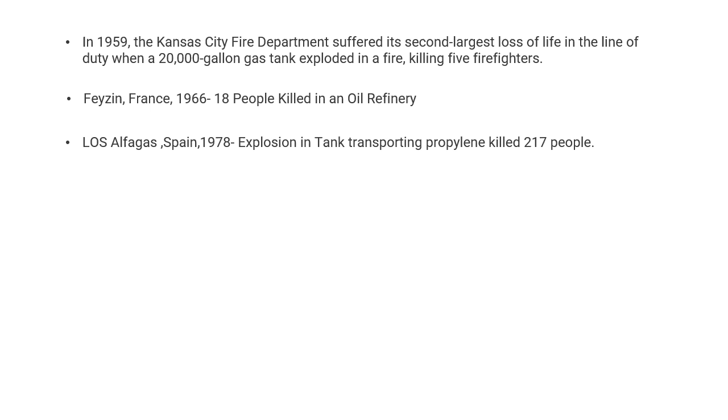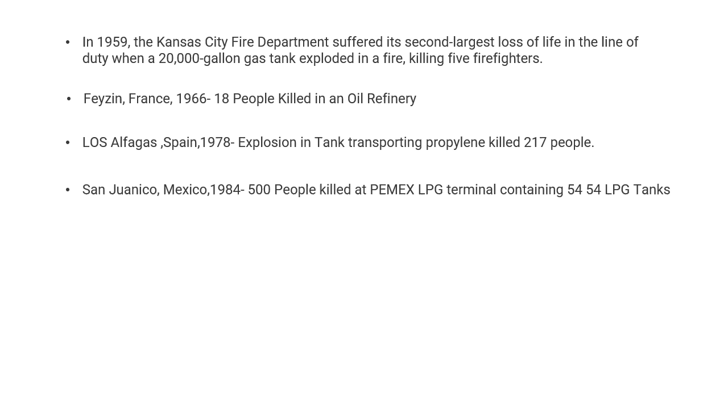But the most devastating of all occurred in San Juanico, Mexico in 1984, where an explosion at the Pemex LPG terminal killed 500 people, turning the area into a scene of utter devastation. These incidents remind us of the catastrophic power of BLEVE and the need for vigilance in our industry.

But what is BLEVE? Simply put, a BLEVE occurs when a pressurized tank containing liquid above its boiling point fails. The rapid drop of pressure causes the liquid to vaporize explosively, creating an intense pressure wave. If the liquid is flammable, this often leads to a massive fireball.

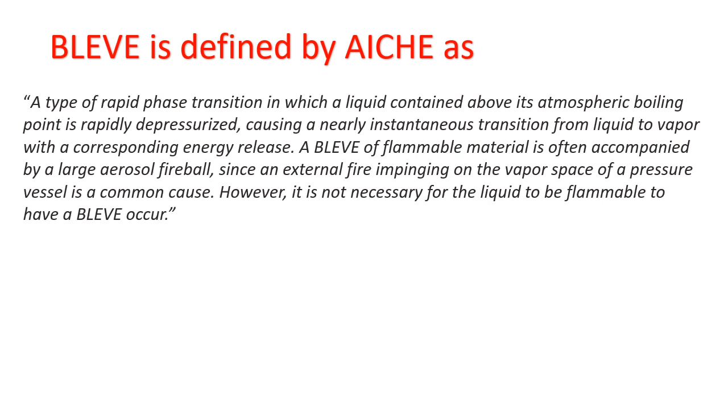The contents of the tank, typically a mix of liquid and vapor, become a deadly force when the tank structure fails, leading to a rapid and violent explosion. Now, what causes BLEVE? The most common trigger is failure of the tank structure due to an external fire or corrosion.

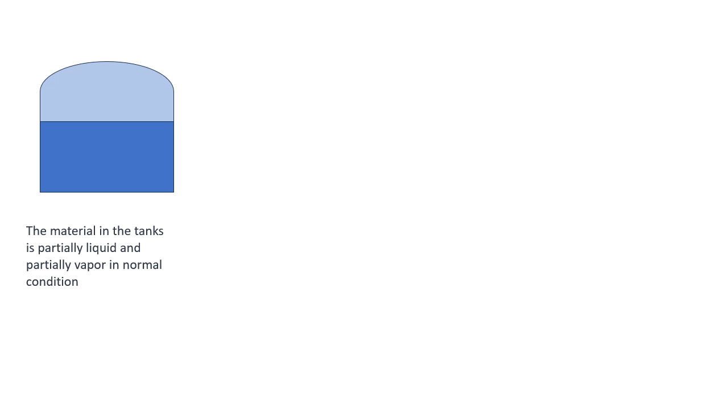As the fire hits the tank, the internal pressure rises until the tank can no longer contain it, leading to a rupture. The sudden release of vapor creates a shock wave, and if there is an ignition source nearby, the result can be catastrophic. It's a blast.

It is important to note that BLEVEs are not limited to flammable liquids. Even cryogenic substances like liquid helium and nitrogen can cause a BLEVE, although these typically do not involve a fireball.

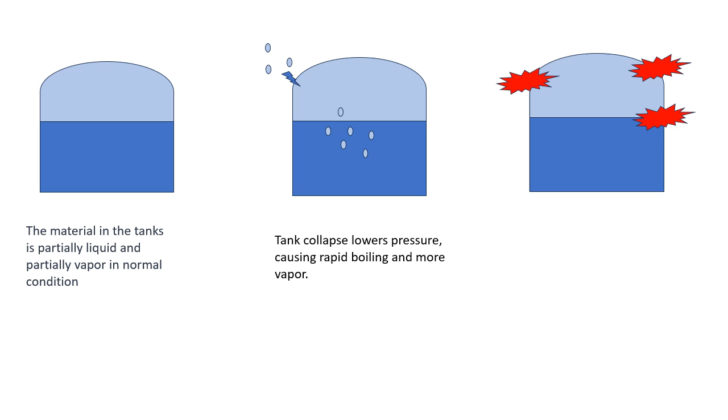Preventing BLEVE is crucial, and fortunately, modern safety measures have made significant strides. Tanks are now equipped with ventilation valves designed to release pressure and prevent explosion. However, these valves can sometimes fail to release the vapor quickly enough, leaving us vulnerable.

To combat this, the European Federation of Chemical Engineering advocates for a strategy focused on preventing losses of both product and energy. Advanced simulations have shown that using insulating coatings on tanks can drastically reduce the risk of failure during fires. With proper protection, tanks can withstand extreme conditions for much longer, reducing the likelihood of a BLEVE.

In conclusion, BLEVEs are a deadly threat that can strike without warning, but they are preventable. By learning from past tragedies, implementing rigorous safety protocols, and continuously improving our protective measures, we can make BLEVE a thing of the past. Let's honor the memory of those lost in these tragic events by committing to a future where safety is our top priority.